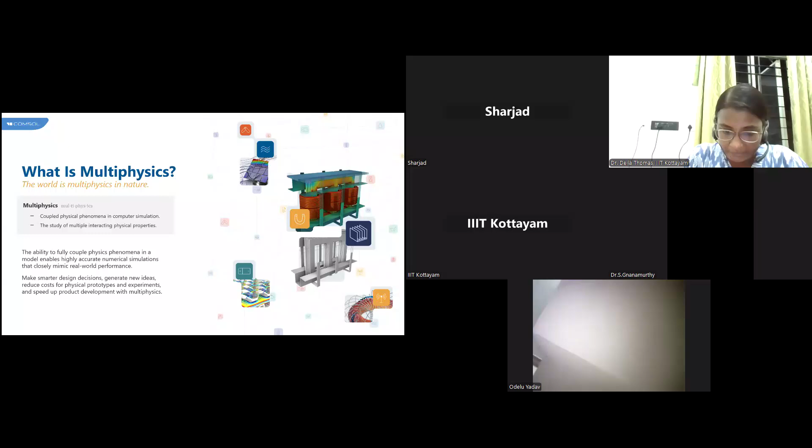Our ultimate objective for developing a product or any kind of device is to attain the maximum efficiency, or the optimum efficiency. Optimum efficiency means reducing all sorts of losses and making it sustainable. From this perspective, multiphysics simulations are really important.

If we take an example of the transformer shown in this figure, the primary or dominating physics in this example is electromagnetics - specifically, low frequency electromagnetics. If you are designing a device without considering any other physics, and only looking into the electromagnetics part, there will be a lot of losses.

That eventually leads to an unsustainable way of usage - there will be a lot of losses, such kind of issues will happen. So we need to understand what all the losses are incorporated in that particular device, like the transformer. While the transformer is running for a long period of time, the primary losses will be in terms of heat. So we need to understand the heat generation.

For that, on top of low frequency electromagnetics, the second physics that comes into the picture is heat transfer - we understand about the heat generation. Once we identify that, after the heat transfer simulations, we understand that the temperature is going beyond the permissible limit of that particular material, which also sometimes leads to some sort of losses.

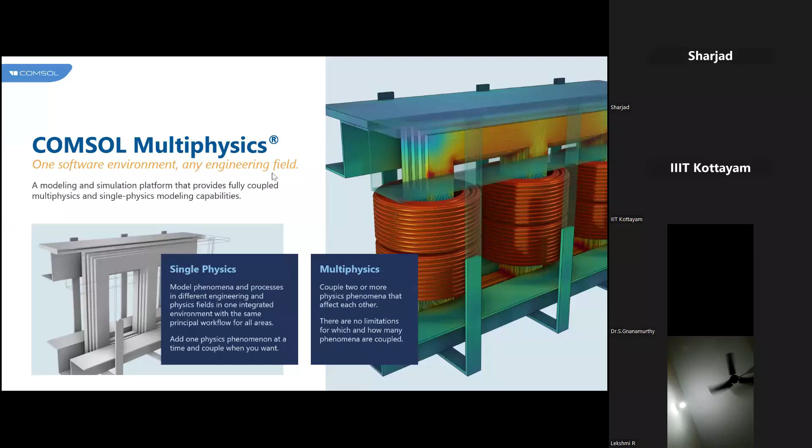So now I'll give a brief idea about what all the offerings from COMSOL Multiphysics are, or what all physics COMSOL handles.

The first physics will be CFD, the fluid dynamics, where you can solve all the problems related with fluid flow. It can be a single phase flow, like laminar flow and turbulent flow, or you want to solve a multi-phase flow where two different types of fluids like gas and liquids are in a single system, or two immiscible liquids system. All such kind of problems you can solve using these fluid flow or CFD products available in COMSOL.

Next physics will be electromagnetics. When it comes to electromagnetics, we broadly classify it into two subcategories: low frequency electromagnetics and high frequency electromagnetics. Low frequency electromagnetics is related with electric machine designs like electric motors, generators, inductors. Such applications we can handle through the low frequency electromagnetics products.

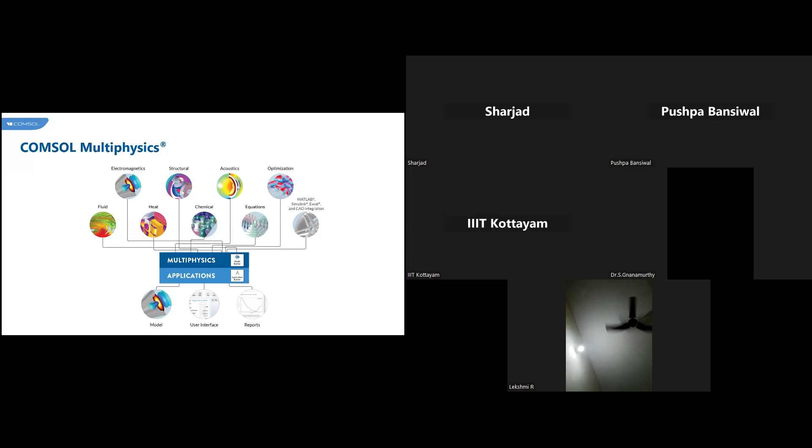Then next will be high frequency. One of the products in high frequency is the RF module. That is specifically for high frequency applications like antenna design, EMI/EMC analysis of PCBs - all such high frequency simulations you can run using such modules.

On top of that, we have modules for semiconductor related applications, like semiconductor devices such as MOSFETs, transistors - all those kind of semiconductor products or devices we can solve from the electromagnetics perspective. We are also capable of solving plasma problems directly. We have dedicated interfaces for plasma related applications, and also electric discharge simulations using the electromagnetics module.

Then next one will be heat transfer. We all know we have three modes of heat transfer: conduction, convection, and radiation. All three modes of heat transfer can be simulated using COMSOL Multiphysics, either standalone or as a combination of all three, or either two of them. All sort of simulations we can run using COMSOL Multiphysics in terms of heat transfer.

Next is the structural mechanics module, where we can simulate both linear and nonlinear problems in terms of geometry as well as material nonlinearity. There are also modules for composites, rotor dynamics - all those kind of structural related problems we can solve using the structural mechanics module.

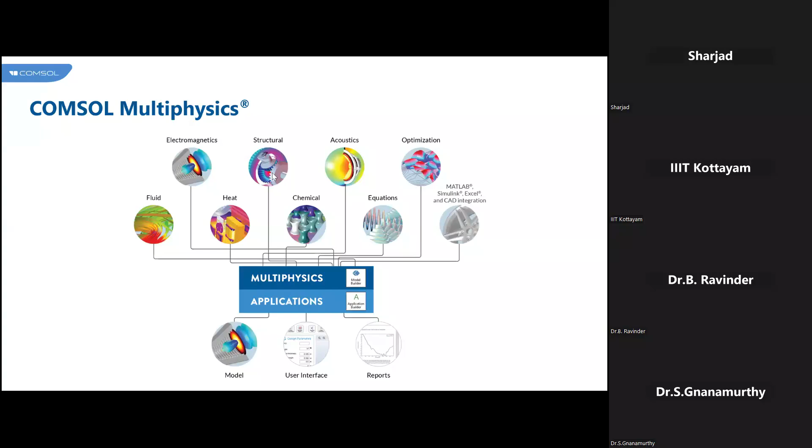When we take an example of external aerodynamics of a car, there are a lot of places where drag is too high, and that drag is actually leading to more consumption of fuel. So by using the shape optimization techniques that are available, you can optimize the shape with the objective to reduce the drag. So you can reduce the drag and increase the aerodynamic performance of the car, and that will eventually increase the fuel efficiency of that particular car. That is one way of optimization, called shape optimization.

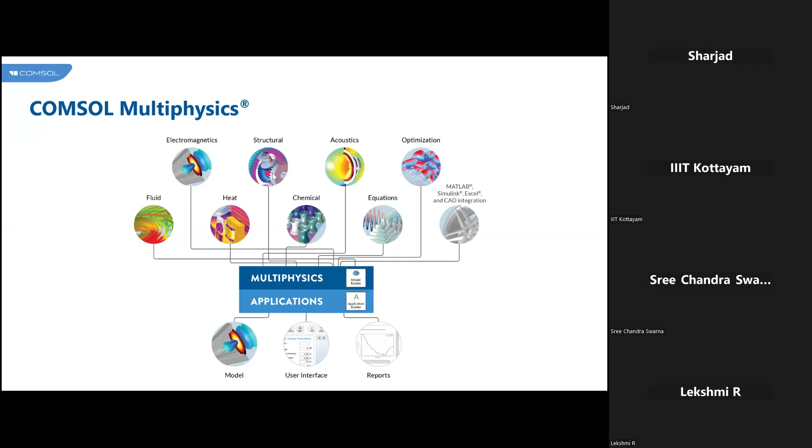Another will be primarily topology optimization. It is mostly for structures, where the objective is material reduction. There will be a few over-designed parts in any kind of device. Those kinds of over-designed parts we can optimize using the topology optimization technique. By using it, you can optimize your design or the part with less material, without affecting the capability or the physics.

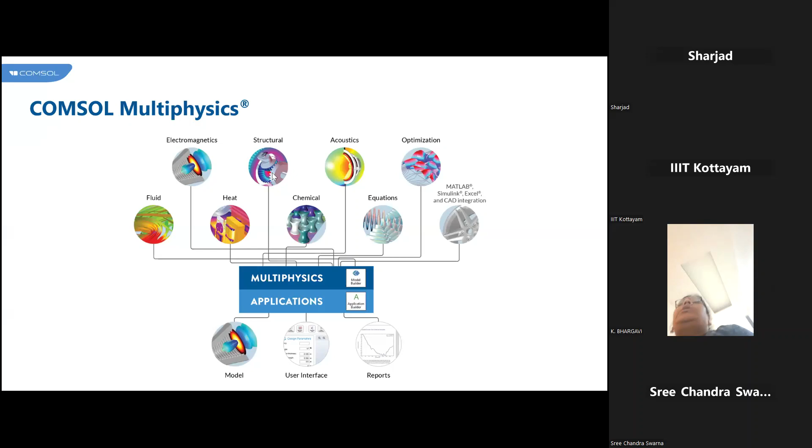By using such techniques, you can cut down the material, so of course it will cut down the cost of your product. Such optimizations you can do using the COMSOL Multiphysics optimization interface, and these optimization techniques work with all the physics tools which COMSOL offers. It can be CFD, structures, electromagnetics, heat transfer; with all those physics you can use these optimization techniques. On top of that, we are providing certain LiveLink features with some other tools that I'll give an idea of in the later slides. So that is all about the various physics which we handle using COMSOL Multiphysics.

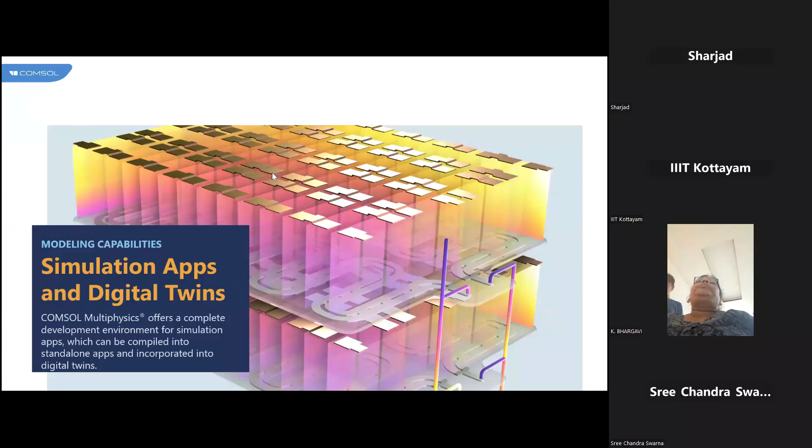On top of these physics-based products, COMSOL offers capabilities for building simulation apps, and based on the simulation app, you can build the digital twin of your model. A simulation app is similar to the applications we usually use on our phone. Instead of doing the entire simulation, to get a very fast simulation we select a few necessary inputs and a few necessary outputs. Based on that, we build an app, and this app can be run even without a COMSOL license. I'll show you how an app looks during the demo part.

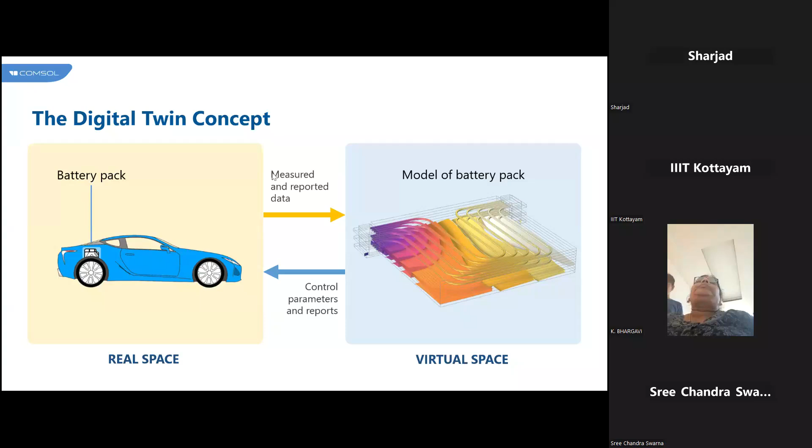As we all know, a digital twin is a connection between the virtual space and the real space, with data transfer between these two spaces. In COMSOL digital twin models, we implement this connectivity through several web services. Here you can see the virtual space has been built by a COMSOL simulation app, and we connect to the real space through this web service. It is a bi-directional connectivity, and we get real-time results. For example, this is a battery pack, and from the battery pack we are getting measured data, for example HPPC data.

It is transferring to this particular battery model, and it is getting processed, and we need to give it back to this particular real space itself. So first, one thing we need to think about is the simulation is supposed to be fast enough. Solving a complete model for such kind of digital twin based applications is really difficult because it's time consuming. We will not get a real time result fast enough if you are using standalone or default models.

For that, actually, we need to build a behavior model. Here comes the application of machine learning techniques in COMSOL Multiphysics. The technique we are using for building such a behavior model is called surrogate modeling. By using surrogate modeling, you can create a computationally less expensive model, which can be based on any kind of physics-based simulations which you have been doing using COMSOL Multiphysics.

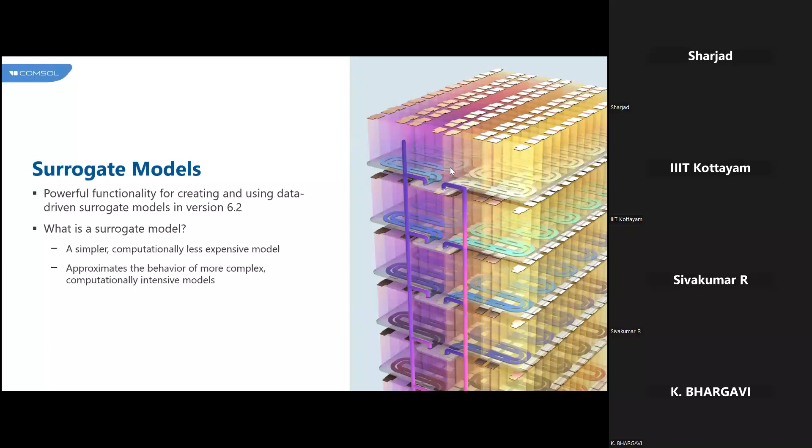Such features are available with COMSOL in terms of machine learning, where instead of running the complete model for this kind of digital twin, you can build a surrogate model or a behavior model using the surrogate modeling feature. Basically, how surrogate modeling works is, initially we will do a DOE or design of experiment based study, a different set of complete simulations. Then we will train those data using a deep neural network technique. Then we will build the behavior model, or we call it a surrogate model.

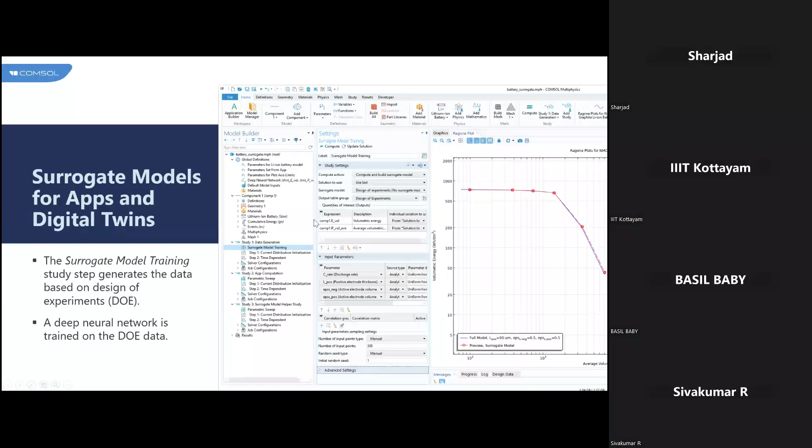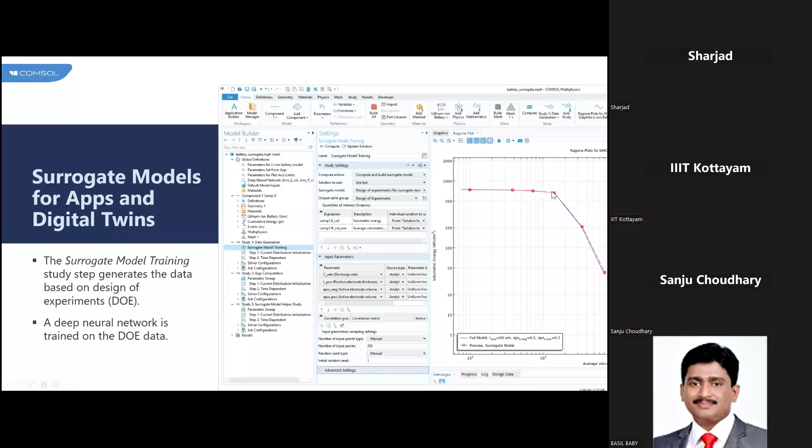This is in the interface itself. You can see this is an example, where the blue continuous lines are the complete full scale model simulation data, and these red dotted lines are the surrogate model which we have built by training the DOE design of experiments data using this deep neural network technique. You can see that we are getting a very good match between both these data. Actually, this is an example of a battery. Such behavior models you can build using COMSOL Multiphysics for developing the digital twin for real-time simulations.

As I have already told, the advantage of developing such a behavior model using surrogate techniques is instantaneous solutions, because this is just a behavior model. Take the example of this particular figure itself, here you can see only 3 parameters and 1 output. If you are changing the positive electrode thickness or negative electrode active material fraction, any of these 3 parameters, this particular result will also get changed instantaneously. That is what we call fast simulations, because if you try to do this kind of change in the legacy model or the full scale model, it will take a lot of time.

But as you have a behavior model with only 3 inputs and 1 output, and we trained a certain set of DOE data using the deep neural network technique, it will work based on that behavior model. So it will predict very fast, so that for building a digital twin, we will get the result instantaneously, and the to and fro communications between the real space and the virtual space will be fast enough. So that is one of the ML techniques available in COMSOL Multiphysics for building digital twins.

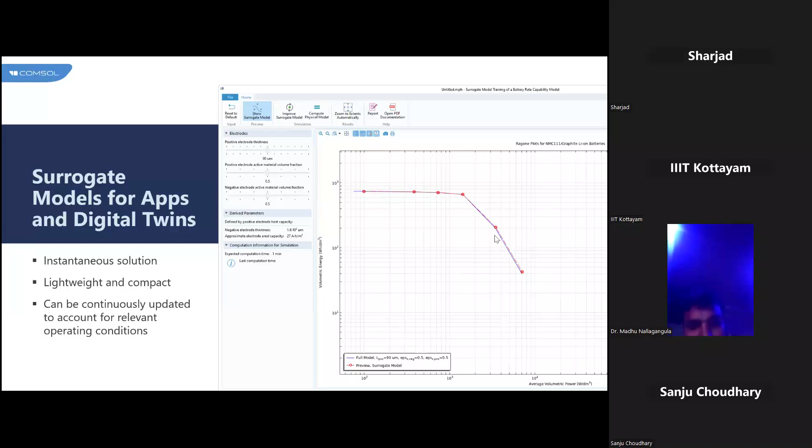For doing all such capabilities, whether physics-based simulation or twin building or twin modeling, we offer different products. The base product is the COMSOL Multiphysics base product. That is the parent code where everything runs. It consists of very basic capabilities as well, like the Model Builder, Application Builder, and Model Manager. All three are part of the base package. On top of that, there are physics-based simulation capabilities, like all sorts of linear simulations we can do using the COMSOL base package.

But if you want to do advanced simulations, for example a multi-phase simulation, that is not a part of the base package. For that, you need to use the CFD Module. Or if you want to do non-Newtonian fluid flow simulations, then you need to use the Polymer Flow Module. Similarly, when it comes to electromagnetics, if you want to do rotating machinery or electric machinery simulations, you need to use the AC/DC Module. The RF Module is for high frequency applications like antennas. Then the Wave Optics and Ray Optics Modules are both for light simulations.

As we all know, light can exhibit both wave and ray nature. So when it comes to wave optics, where the characteristic length of the device is nearly equal to the wavelength of the light, in those cases we will use wave optics. In that case it will act as a wave. Then ray optics will be primarily for optical systems where the characteristic length of the device is much higher than the wavelength of the light. In such cases we will use ray optics.

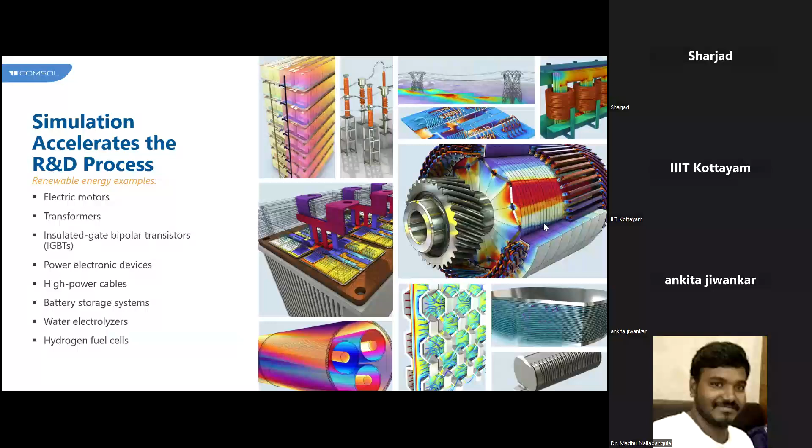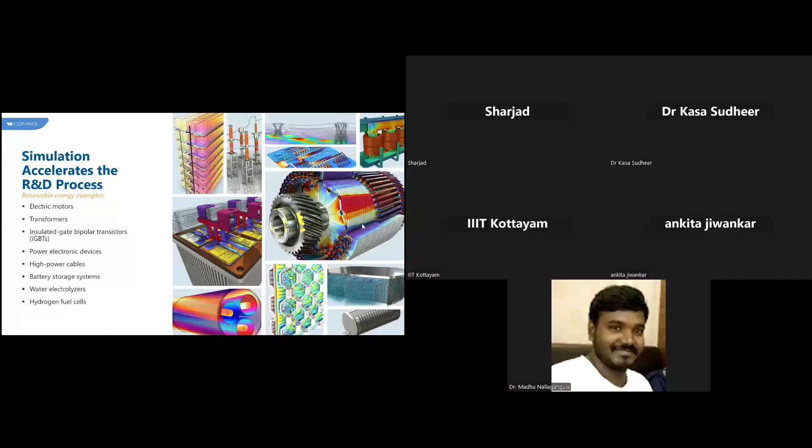Hello, someone unmuted. Hello. Okay. So I request all the participants, please mute your mic.

So when it comes to simulation-driven R&D processes in the various areas of the renewable energy sector, the first one will be electric motors. A lot of losses can happen in that device if you're not designing it properly. These days, research related to electric motors is booming because of EVs and hybrid vehicles. So we can use the capability of COMSOL for designing various types of motors, transformers, different types of IGBTs for semiconductor devices, power electronic devices, batteries, electrolyzers, hydrogen fuel cells, and solar cells.

I didn't include all those areas in the slide, but there are different areas where we can use the capability of simulation for developing very sustainable products or optimized products. Right now I'll just give very brief ideas about the various aspects, but you can connect them with your own research areas. Maybe I am only able to cover very few things within a short period of time,

but at the end, if you have any doubts, you can ask, or you can connect with how things are working, because I'll cover a few physics right now, and for the rest you can connect and get back to us.

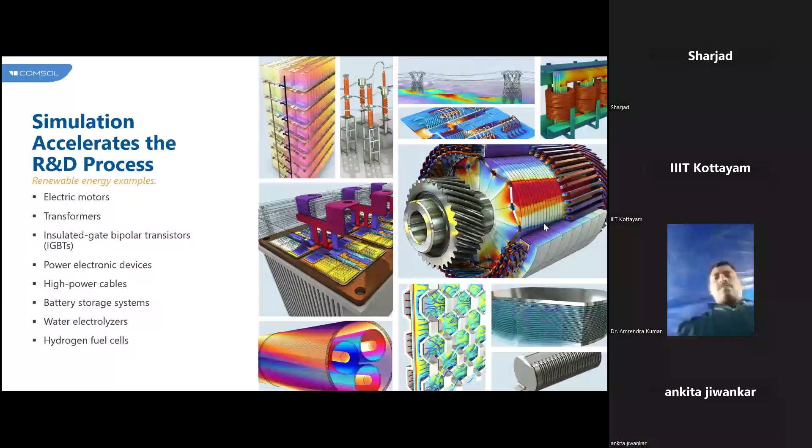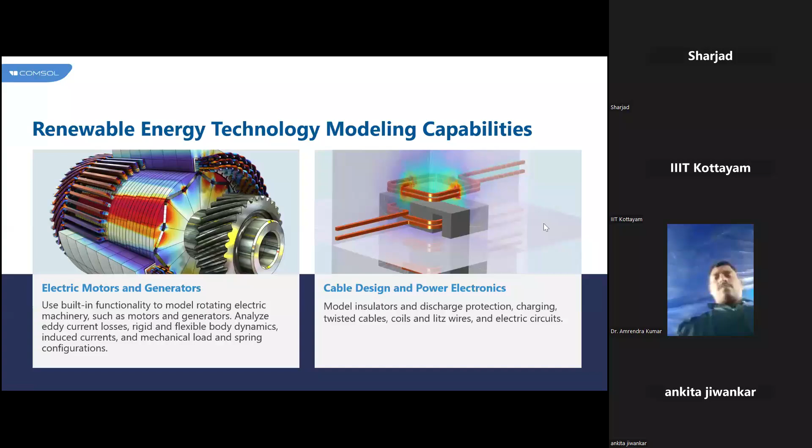The first one I will talk about is electric motors and generators, and also the modeling of cable connectivities and power electronics. For all these kinds of low frequency simulations, the module we usually use is the COMSOL AC/DC module. Using that, you can develop various electric machines like permanent magnet machines, linear motors, or axial magnetic bearings. All sorts of moving or rotating machinery you can simulate using COMSOL Multiphysics.

You can also do various electromagnetic heating simulations by coupling the AC/DC module with the Heat Transfer Module. Through this coupling, you can understand the heat generation, and you can use several techniques to reduce that heat generation. That will lead to the optimum performance of that particular device.

This is a case study where the COMSOL team worked with Volkswagen on developing an electric motor. Initially they started with the design of electric motors. Then they understood that it is a repeating R&D process, so they built an app as well, based on the results they got and the model they had built. They did multiphysics simulations to understand the electromagnetic behavior as well as the thermal behavior of the electric motor for their EVs.

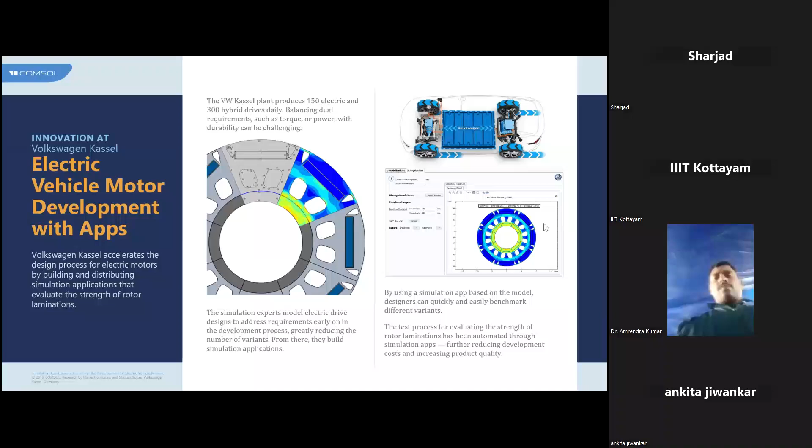Another application is related to the IGBT. Again, it is primarily a multiphysics problem where they are looking into electrothermal as well as thermomechanical simulations. This semiconductor component is placed in a situation where a lot of heat comes into the picture, and there will also be a lot of vibrations. So they need to understand how this device behaves under various thermal conditions as well as various mechanical conditions.

Initially they did an electrothermal analysis by coupling the electromagnetic solver with the Heat Transfer in Solids, that is the Heat Transfer Module. Once they got the temperature data, because of the temperature rise and the environmental temperatures, there will be some thermal stress formation and it will affect the mechanical performance. For that, they did thermomechanical simulations by coupling heat transfer physics with structural mechanics.

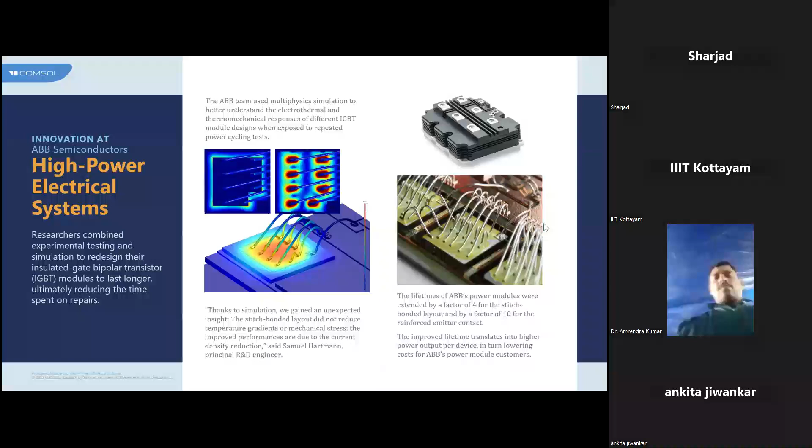So it is actually a three-physics problem where electromagnetics, heat transfer, and structural mechanics come into the picture for developing such IGBT systems or high power electrical systems. So that is about implementing electromagnetics-related simulations for renewable energy.

Another area where a lot of research is happening these days is batteries as well as hydrogen fuel cells. These two areas are growing because of the boom in EVs, not only in India but all over the globe. A lot of people are actively working on different aspects of fuel cells, electrolyzers, and batteries. And COMSOL offers dedicated interfaces for both applications.

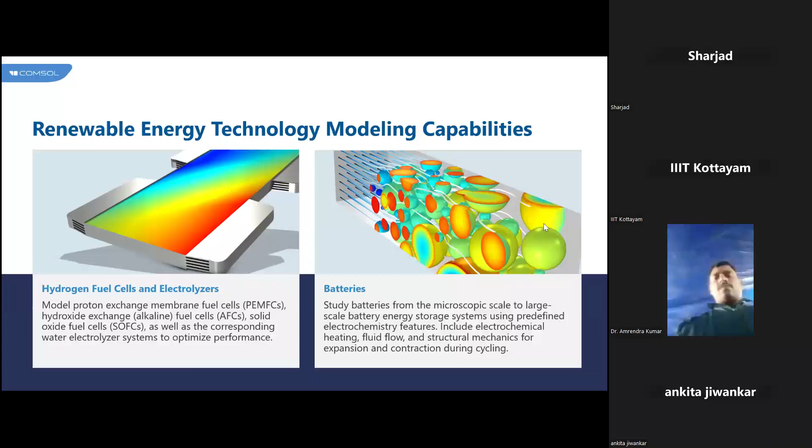When it comes to battery design, we offer the Battery Design Module, which is specifically for battery design, and it consists of various built-in interfaces for lithium-ion batteries, redox flow batteries, lead acid batteries, or you can build your own battery electrochemistry. All these electrochemistries I have explained are available built-in. But on top of that, if you want to add your own electrochemistry, that is also possible.

By using the Battery Design Module, we are able to simulate batteries at various levels. The first one is the heterogeneous model. The heterogeneous model is for when you want to understand the very micro scale level of an electrode itself, or the particle in the electrode itself. Such simulations you can do using the heterogeneous model.

It is actually very in-depth. Usually the battery manufacturers will do such kind of simulations to understand the performance of that particular electrode which they have been building. So it is more of an in-depth analysis.

Next is the homogeneous model, where instead of designing each particle in that particular electrode, we take it as a homogeneous electrode. It will be a complete 3D structure. Then we will do the battery simulations, the cell level or a pack level simulation.

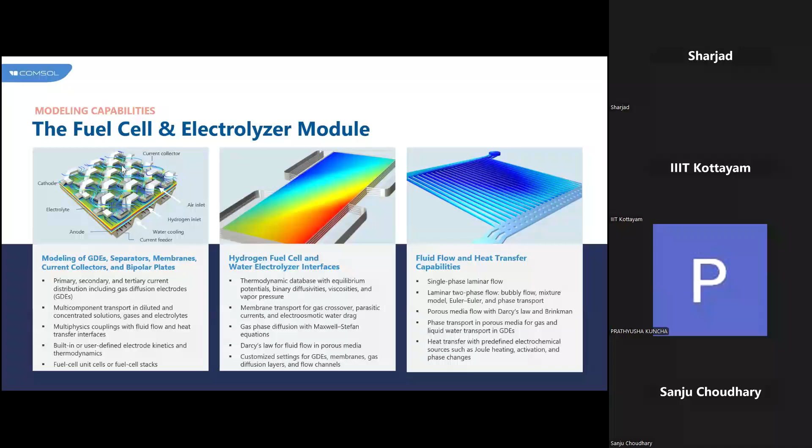Next is fuel cell and electrolyzer. For the fuel cells as well, we have different interfaces for proton exchange fuel cell or the normal water electrolyzer. All those interfaces are directly available in COMSOL for doing fuel cell related simulations. On top of that, you can add these fuel cell or electrolyzer interfaces with fluid flow and the heat transfer module for enhancing the development of that fuel cell, or understanding the multiphysics or the flow behavior. All such problems you can handle by coupling the fuel cell interface with the fluid flow or the heat transfer interface.

So this is just an example of building a PEMFC fuel cell model in COMSOL, where you can build the electrochemistry and the fluid flow, and also couple the heat transfer, so it becomes a multiphysics simulation, where we couple different physics together for the optimum design of this particular PEMFC fuel cell. Such kinds of problems you can solve.

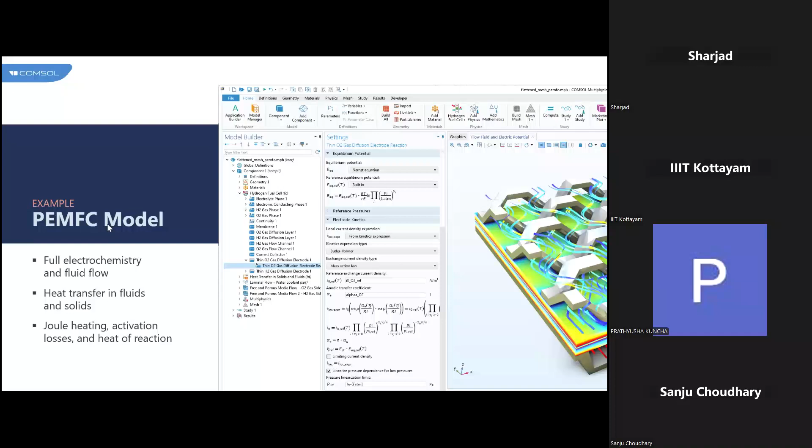So for this kind of battery cooling simulation, what you can do is design the entire battery pack as 3D, and design the pipe circuits as 1D, and club them together. That feasibility is available in COMSOL, where one physics you can develop in a lower dimension and another physics in a higher dimension, and you can couple them through the multiphysics coupling and solve. This kind of capability helps reduce the complexity of your problem.

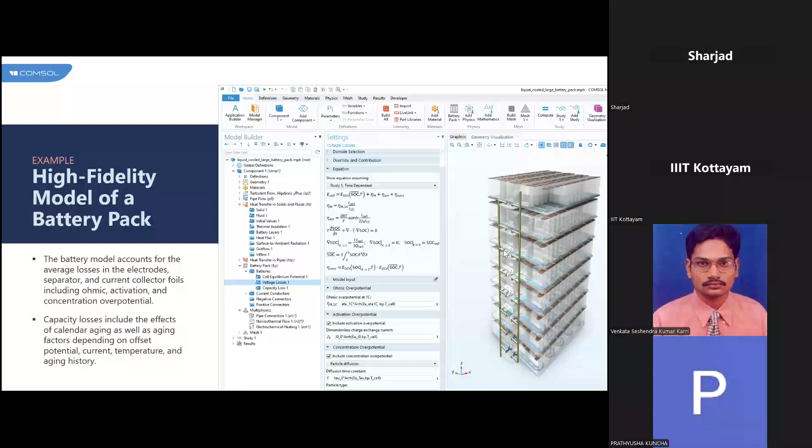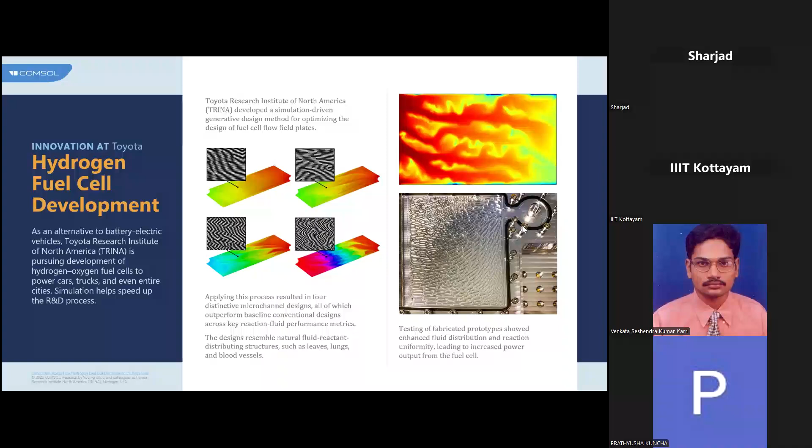Till now, I was talking about the physics like electromagnetics or fluid flow or the fuel cell or battery. When we're developing any of such kind of devices, the loss is primarily because of heat transfer. There will be some other losses as well, if two components are designed and connected together.

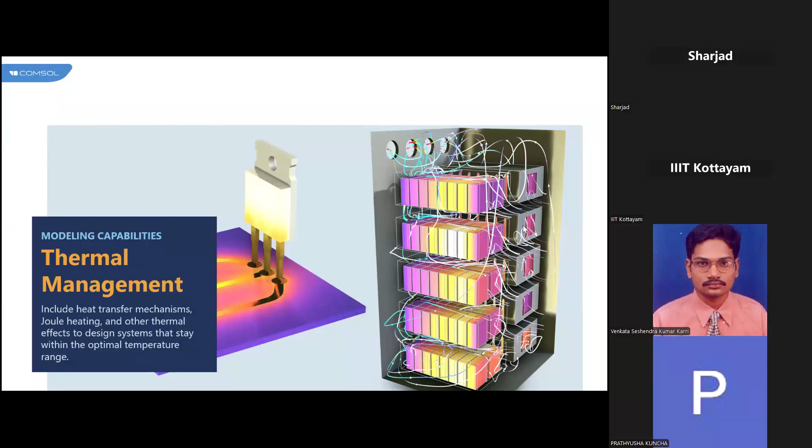If you connect it together and there is relative motion, of course there will be some friction, and because of the friction, heat generation will happen and losses will occur. Even when it comes to electromagnetics, because of resistance, there will be some heat, and that will lead to losses. So understanding the heat loss or the thermal behavior of the system is really important when we are designing any kind of device.

With this, we can reduce the losses and increase the performance of our particular device. So for that, the thermal management study is really important.

If we take the two physics I have already explained, the basic three modes of heat transfer which COMSOL can handle are conduction, convection, and radiation. All three we can solve as standalone. For example, if you want to solve conduction alone, that is possible. Convection alone, that is possible. Or radiation alone, that is possible.

Or if you want to solve the combination of two or all three, that is also possible. If you take an example of conjugate heat transfer, it is a kind of phenomenon of conduction plus convection, where there will be heat transfer in solid medium as well as liquid medium. Such kind of problems also we can solve.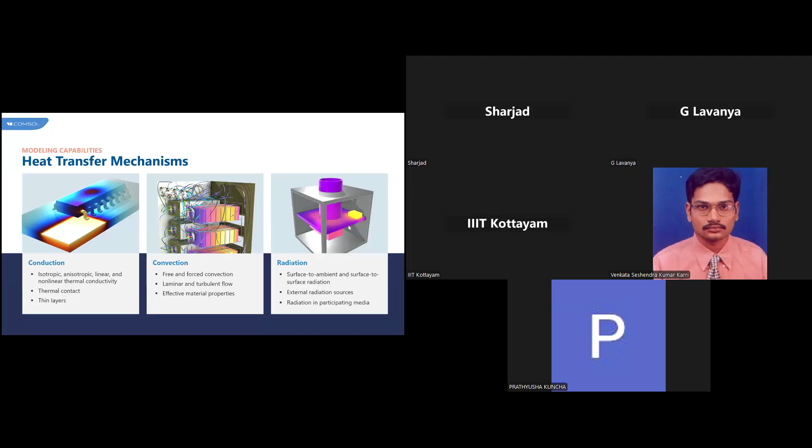Some other features when it comes to heat transfer modeling using COMSOL: by using COMSOL, you can directly accommodate various types of thermal conductivity like anisotropic, linear, non-linear, all those kinds of material properties directly in COMSOL Multiphysics, where you don't want to write any additional code. And also there are features like thermal contact, because if two parts are getting in contact with each other...

One method is you can directly design the two components as a single part and solve the problem, where conduction will be completely direct between the two parts. It is more idealistic in nature.

Actually, if it is an assembly kind of problem, we require a kind of thermal contact boundary where you can specify the source and the sink so that the heat transfer will be proper, and if there is any loss, that loss will also get captured. If it is designed as a single part, there will be no loss — that's what I meant by idealistic. When it comes to the real scenario, that loss will happen.

Without going with such an approach, if you are designing, definitely it will be an inappropriate design and the losses will be more. So you can use the thermal contact feature available in the COMSOL conduction module for providing the boundary condition for heat transfer from one part to another, where it is getting touched in a partial way, for assembly kind of problems.

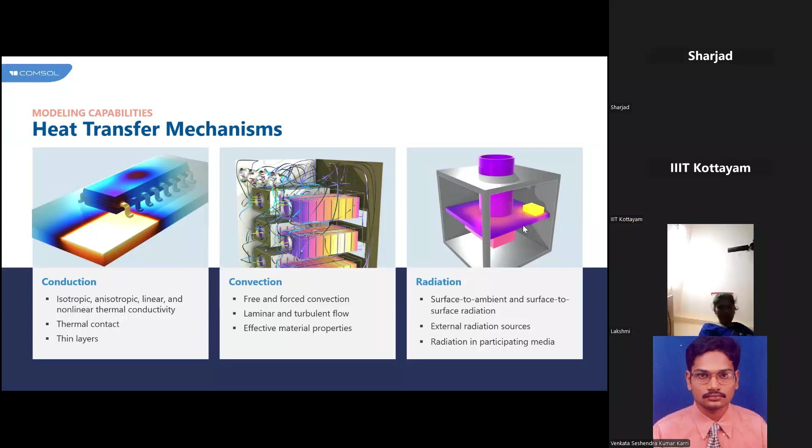Next is convection. Both free and forced convection we can solve using COMSOL, where when it comes to the flow part, you can accommodate both laminar and turbulent flow, and also different types of turbulence models can be used for this kind of convective problems, and you can couple conduction and convection for conjugate heat transfer problems.

Another is radiation, where your temperature is too high and heat dissipates in the form of radiation. This becomes really important for semiconductor applications. You can simulate surface to ambient radiation, radiation in participating media, or surface to surface radiation - all these different radiation mechanisms we can directly solve using COMSOL Multiphysics. So these are the different types of heat transfer mechanisms we can solve using COMSOL.

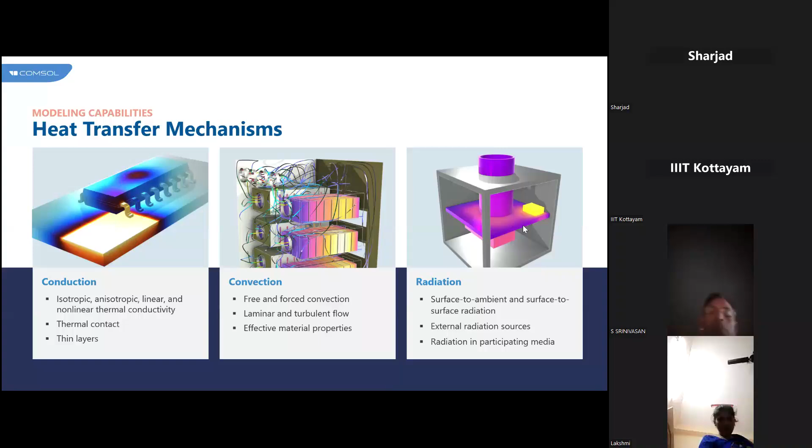So solving any kind of heat transfer problem, the key important feature is the heat source. As I've already told, when designing a particular problem, the heat source is not idealistic. If you are designing a motor, for example, and want to design it efficiently, you need to do an electromagnetic simulation. Because of the electromagnetics, there will be heat generation - that is electromagnetic heat generation. So basically that is the heat source.

So in all the CAE tools, there are different methods. The first method in almost all CAE processes is user-defined expressions. In this first approach, how we solve the problem is we input the heat value directly - for example, 1000 watts or something - or we write it as an equation itself. So that is one method, the first idealistic approach.

Another approach is solving one problem, taking the heat map value from that, then adding it to the heat transfer and solving. This is the kind of approach most tools basically use, where they'll solve the first physics, then take the temperature or heat value and give it to the heat transfer solver, then solve the heat transfer problem. It is also idealistic in nature, with no bidirectionality, not considering the aspects of interchanging data. So the best approach for understanding heat generation because of losses is multi-physics coupling, where we couple different physics together in a single interface and solve the problem.

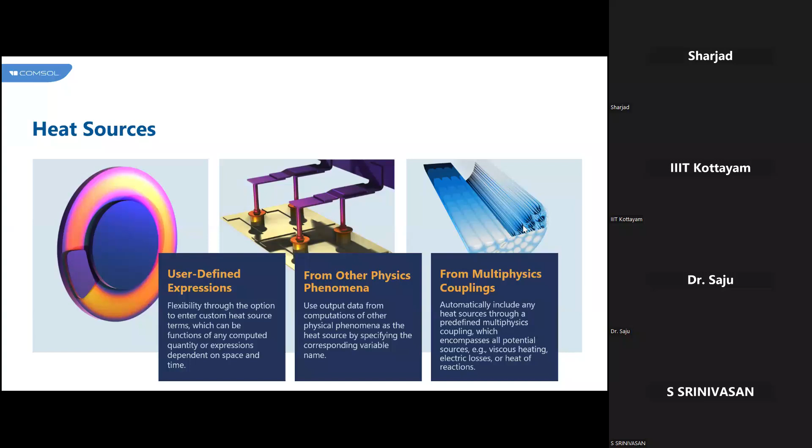The different multi-physics couplings available are: first, microwave heating - that's a coupling between the RF module, the radio frequency module, understanding heat generation because of microwaves. One particular example you can see is a chip inserted inside a human skull. Because of the continuous operation of the chip, how much heat is generated and how it's transferred to the human body - such simulations we can do, coupling RF with heat transfer.

Next is Joule heating. This is an example of a bus bar where there's electric current, and because of electric resistance, there's some heat generation - that we solve with Joule heating. Next is inductive heating. All three - microwave, Joule, and inductive heating - fall under the electromagnetic heating part.

Next is the thermoelectric generator or thermoelectric effects, like the Seebeck effect and similar problems you can directly solve using COMSOL. Next is conjugate heat transfer, where we couple CFD with heat transfer, or the fluid flow module with heat transfer - that's also a key important feature.

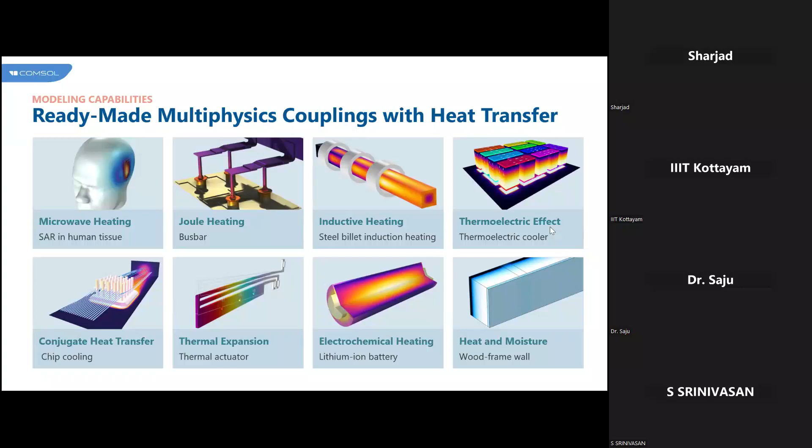So for such kind of problems, you don't want to build the multi-physics interface manually. You need to select the first two interfaces, and automatically the respective multi-physics will get developed in the model builder. I will show you that later.

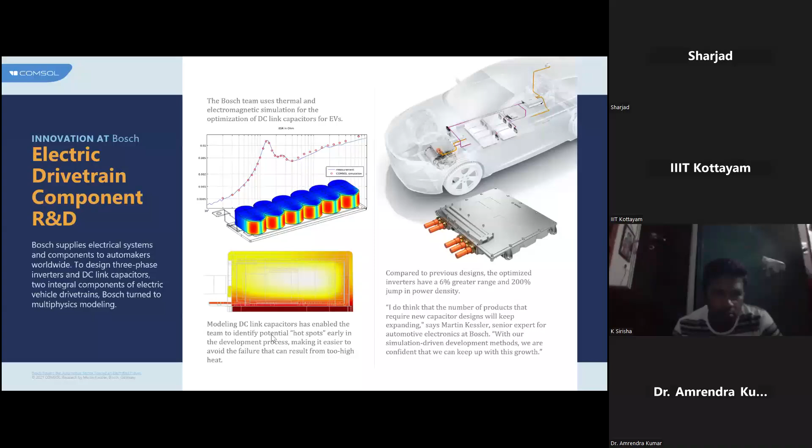So that is about the heat transfer part. This is a case study where our team worked with Bosch, where they were developing a DC link capacitor. These DC link capacitors are closely packed, so they were already aware there would be significant heat generation. They needed to predict how much heat is generated and what type of cooling mechanisms to use. So even before starting experiments or building the product, at an earlier stage itself, they did the simulation using COMSOL multi-physics. They understood the hotspots in that device and used proper cooling mechanisms to reduce the heat, and came up with the optimum performance of that DC link capacitor circuit.

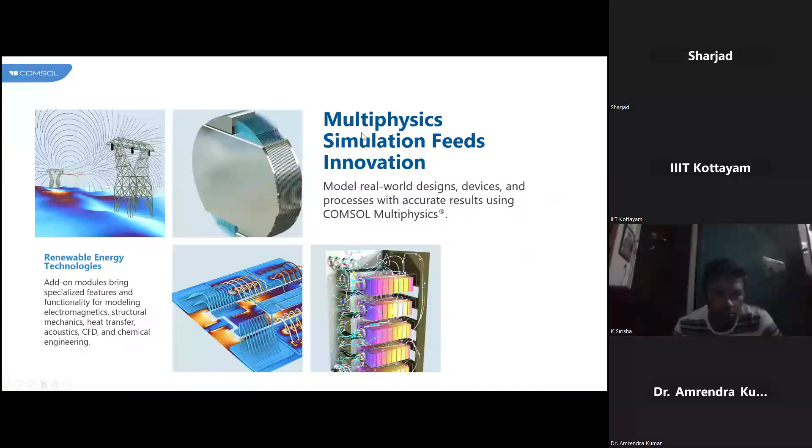And the next, sorry. Okay, so that is about the one case study from the heat transfer perspective. Now I'll just quickly open the tool and explain.

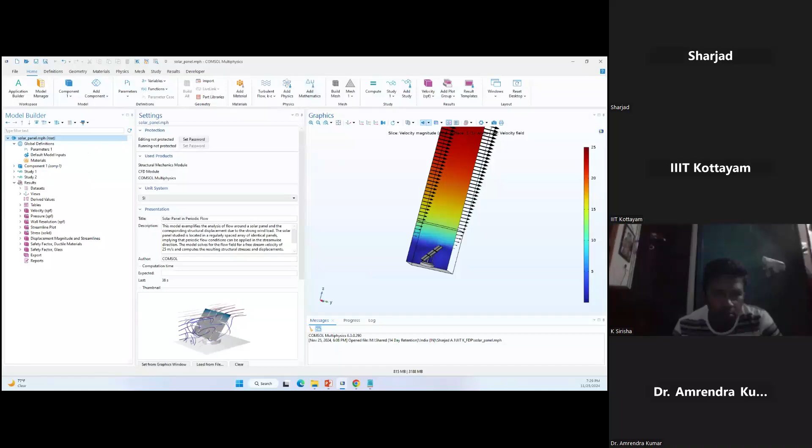Sir, is this an open source tool or? Hello? Is it an open source tool, sir? No, it's a licensed tool.

Okay sir, thank you. So this is how the COMSOL multiphysics interface looks like. This is the ribbon tab where all the functionalities for building a model will be available. And this will be the model builder window, where we will give all the inputs one by one for the requirements of building a model. So that is the model builder.

The next is the settings window. If you select a node from the model builder, the corresponding inputs we will give in the settings window. This is the graphics window, where the user will get the visual, can see the changes or see the model - the visual things we can actually do over here in the graphics window.

This is the information window. We will get information regarding the model you have been building. If you're getting an error, warning, progress, or log files during the simulations, we will get it from here. So that is the overview of how the COMSOL interface looks like.

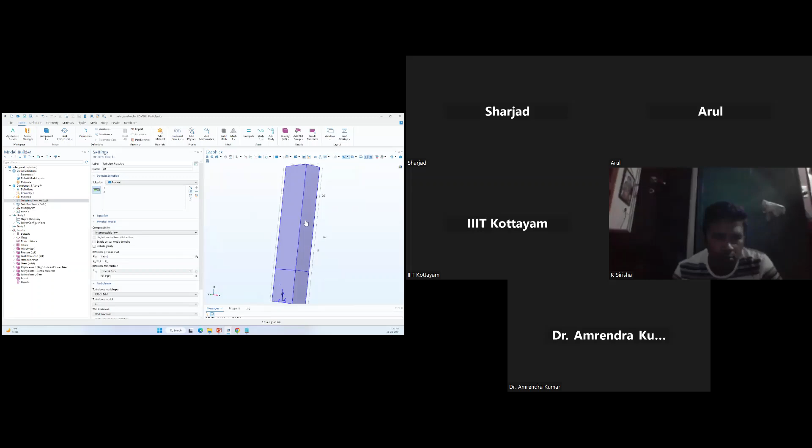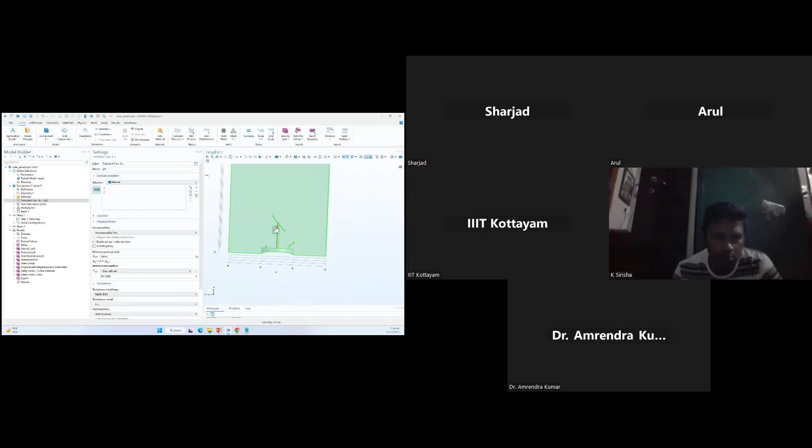Now, this is actually a problem of a solar cell or solar plates, which is placed in a specific location where wind is flowing with a specific velocity. It is actually meant to understand the structural or fluid-structural interactions. So the two physics that come into the picture are solid mechanics and turbulent flow.

Before that, I'll talk about the hierarchy or process of building a model in COMSOL. As we all know, all the CAE process usually starts with geometry creation. For building the geometry, COMSOL has a lot of tools directly available, like extrusion, revolve, and all those kinds of operations. By using those operations you can build your design in the COMSOL interface itself, or else you can import the design from a third-party tool as well.

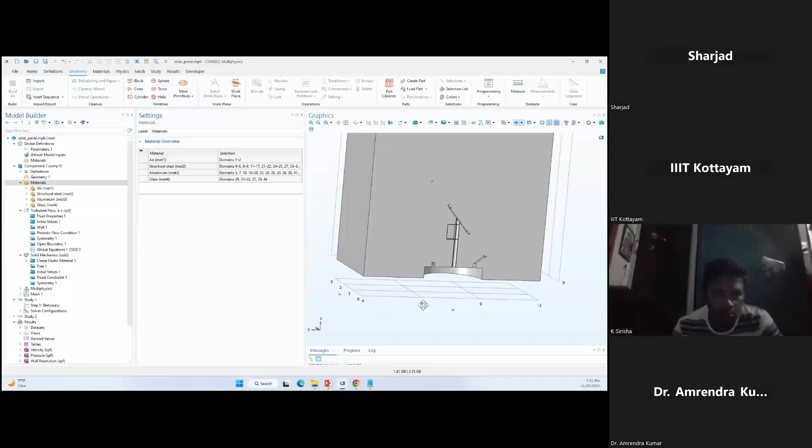Once that's done, you need to select the material. In this case, we actually build the model in COMSOL itself, but for demo purposes I have imported it from external files. Okay, so next we need to add the materials.

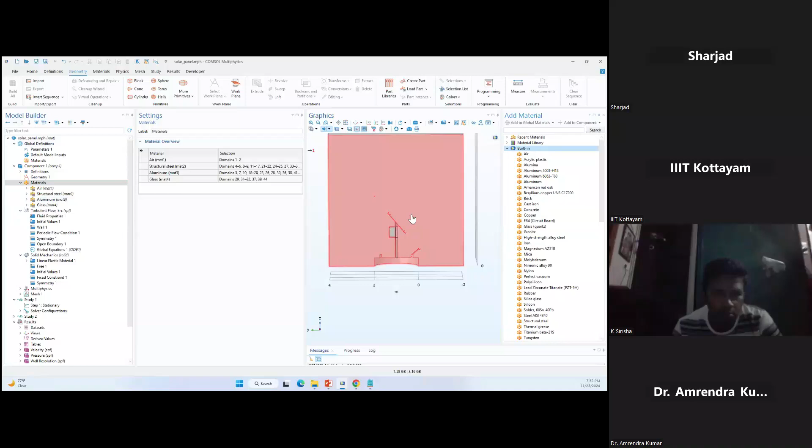When it comes to the material library, COMSOL has a very vast material library consisting of more than 15,000 materials available, listed based on applications - AC/DC if you're solving battery related problems, or semiconductor related materials if you're solving semiconductor problems. All those materials are available, or generic materials like air and water, in the built-in drop-down list. From that, you can select the necessary materials required for your simulation directly over here. You just double click on that particular material - for example, I select the high strength alloy steel.

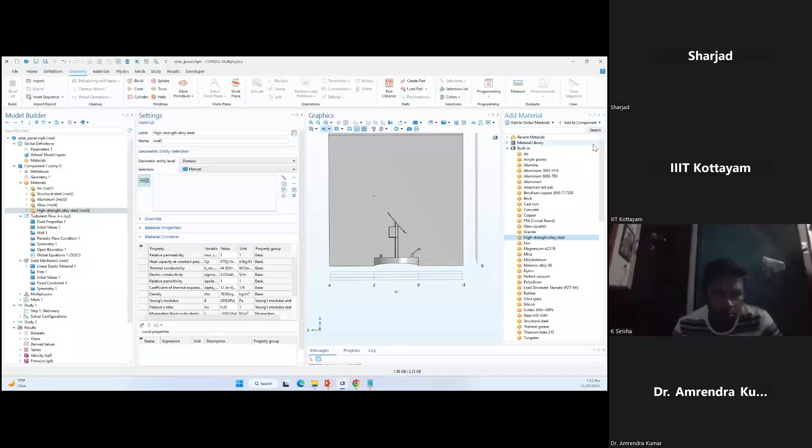If I double click, it will actually add it into our particular model builder. Then you can select the domain where you need to assign that particular material. So for an example, if you take air, this entire domain is considering it as air. Okay, that is the atmosphere.

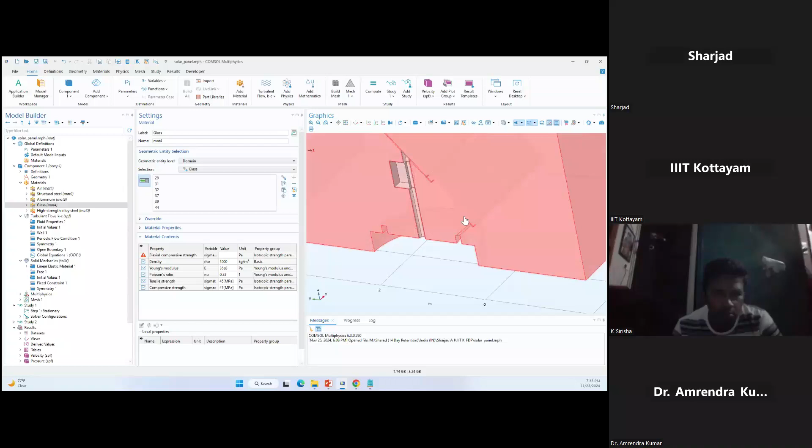Then there are domains where structural steel is provided. There are regions where aluminum domain, or there are places where glass, that is actually the solar cell. Glass is actually the property we give to the solar cell. The accurate properties also you can give. So in such a way you can add the necessary materials required for the simulations, and you can add them to the corresponding domains.

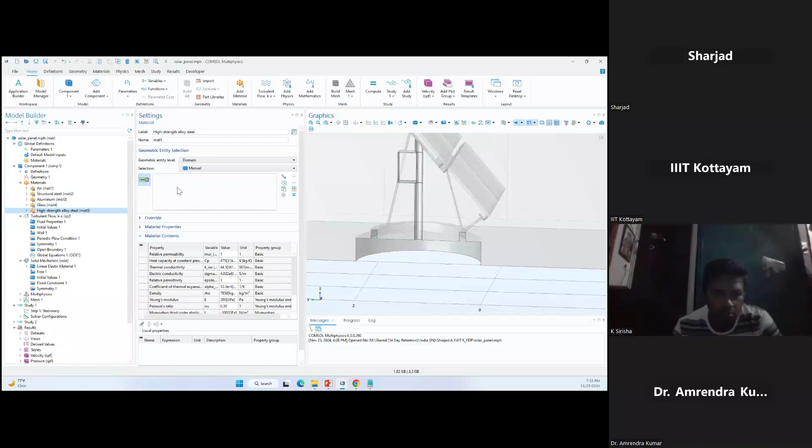So if there is any part having a high strength steel, you can select it accordingly, and that material property will be assigned to that particular part. So that is the process of adding materials for the simulation. After that, we can provide the information regarding the physics, where the various types of boundary conditions you can give.

So primarily, while solving any kind of a problem, there will be a few default nodes, like fluid properties. So two ways are there. Either those required fluid properties will be taken from the materials which we have provided over here. For an example, in this particular part, the two domains 1 and 2 are assigned to air. So for this particular fluid properties, they will take the properties from this particular air material. So that is how this particular feature works.

But on top of that, if you want to add your own material, you can use the user defined function, and you can actually give the material property over here. So those options are also available. Then next is initial value. For solving any problem, we require the initial parameters that you can give. Next is wall, for all of the wall regions. Next is the periodic boundary condition.

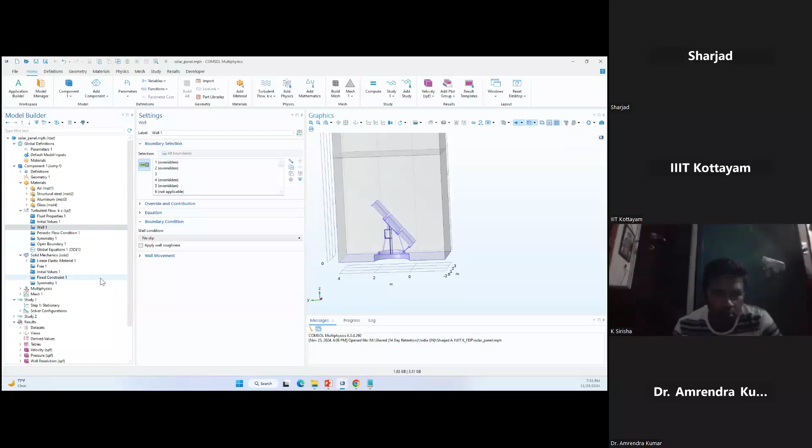So why we give the periodic condition is that this is actually repeating. We are doing a kind of a symmetric problem, and it will be periodically placed with n number of rows and columns in the array. For such kinds of problems, you can use periodic boundary conditions, where the flow comes and leaves. Then if this particular solar cell is placed over here, the inlet condition for that particular solar cell is the outlet condition of this particular face.

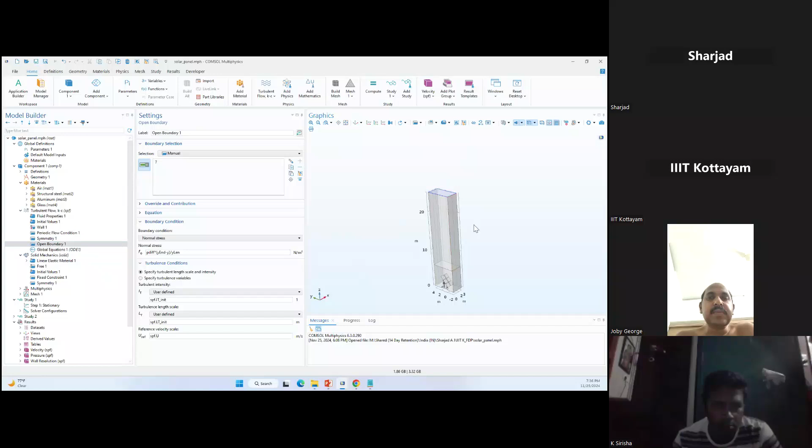So such a continuity is given by using this kind of periodic flow boundary conditions. The next is symmetry, because it will be placed symmetrically, there will be repetitions. Next is open boundary. Open boundary is a feature where it is completely exposed to the atmosphere, a huge amount of air domain. So that we collectively call this open boundary.

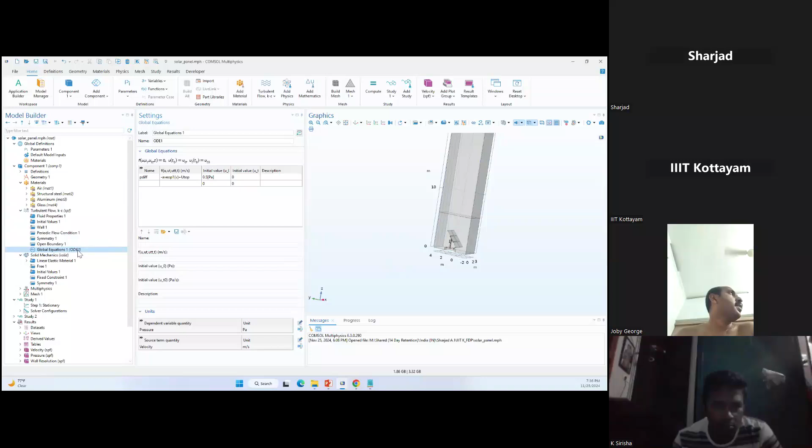Then one simple equation I have added for considering the pressure difference between the inlet and the outlet of this particular periodic flow. So that I'm giving as an equation. Why I did it is to show how we can add our own equations using equation based modeling. While talking about the various capabilities of COMSOL, I hope you remember that I already explained that we can add our own equations into the simulation. So this is how we can add them.

So I have created a term called pressure difference. That is the pressure difference between these two surfaces in the open boundary as a function of velocity at the top surface, as well as the average velocity which is calculated by the solver itself. So in such a way we can create our own parameters and add them as a boundary condition or a domain condition for the simulation.

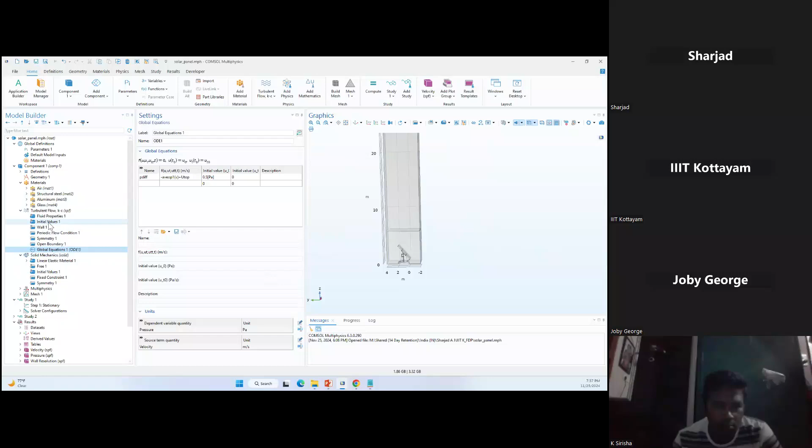So for that, we don't require any code. It is actually possible through the GUI process. Just to demonstrate that, I have added this particular pressure difference. So that is about providing the boundary conditions for the turbulent flow.

So here, users who have already used CFD tools will have a question that there is no inlet and outlet. Actually, these periodic flow conditions take care of the inlet and outlet, so you don't need any additional inlets and outlets for this kind of CFD problem where the flow is periodically repeating in nature.

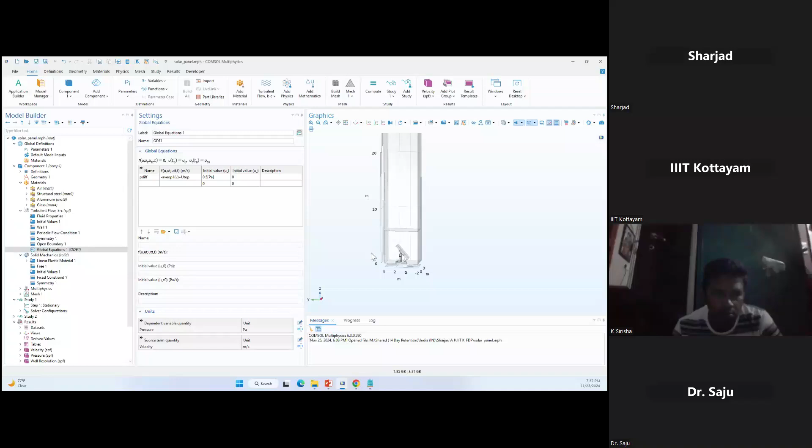So next is the structural mechanics. Here you can see for the structural mechanics, we have assigned all the domains other than that particular air region. When it comes to this particular elastic material, here as well material properties are there. They are taken from the material properties which we have assigned over here.

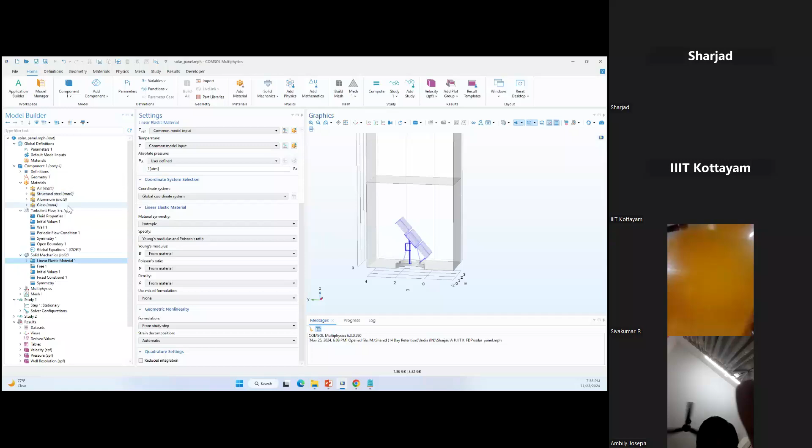Then we need to give the boundary conditions like fixed boundary. On top of that, the various boundary conditions available are something like boundary load, that is if you have a load on a specific boundary, you can give that. Then fixed constraint is for the fixed support. And if you have a prescribed displacement, a boundary that is actually moving in a specific direction by a specific length or distance, you can provide it over here.

And also the roller boundary condition, if there are situations where there is movement in the plane, you can do that, and also the thin layer. So such various boundary conditions are available for structural mechanics. Similarly, different boundary conditions are available for fluid flow as well, and for all the physics it will be available.

Which boundary conditions and how you need to set up the problem, either you can go through the theory manual related to that particular physics, and as well there are a lot of examples available in COMSOL itself that I will show you at the end of the demo. Okay, so once we provided the necessary information for these two physics, next we need to...

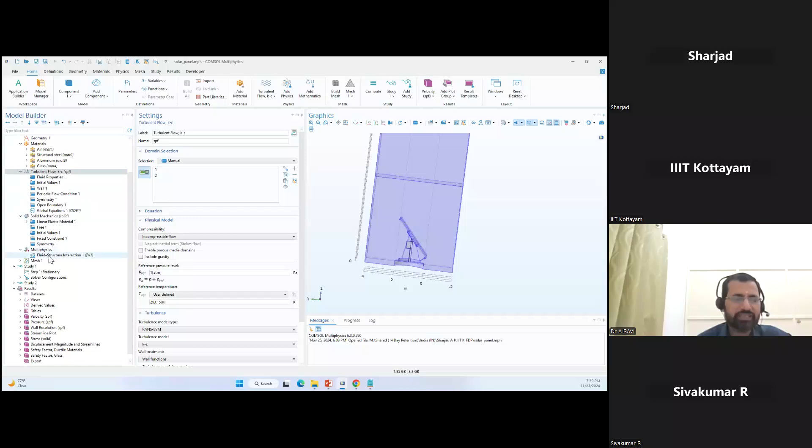Excuse me, sir. Yes. Sorry, sir, I am Dr. Ravi. If you don't mind, another resource person is also waiting, sir. Please try to... Yeah, till 8 o'clock. I think 6:30 to 8, right? Yes, sir, till 8. Sure, sure, I'll wind up by 8 o'clock. No problem. Fine, sir. Thank you. Okay.

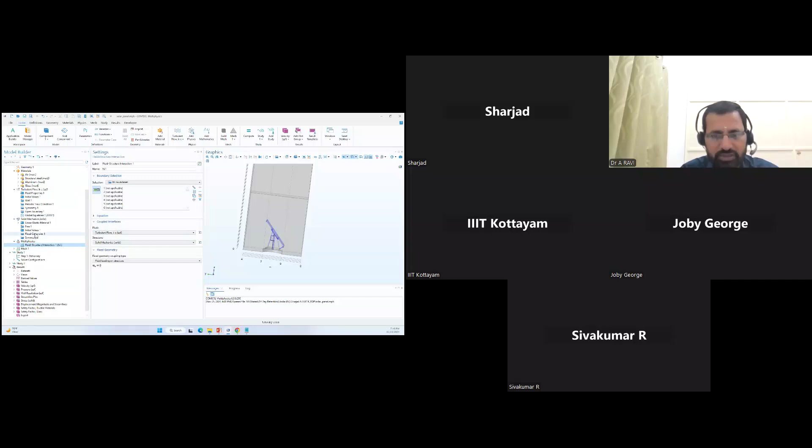So after we provided the information for these standalone physics, as I have already told, we have dedicated built-in multiphysics interfaces that give the connectivity between these two physics. Fluid structure interaction connects the turbulent flow and the solid mechanics. COMSOL is intelligent enough to take the necessary data from here for solving this kind of multiphysics problem, where the user doesn't need to think much about the multiphysics part. It will be automatically taken care of by the solver itself.

That is what I explained during the initial phase itself, that COMSOL has various multiphysics interfaces available by default as a built-in feature. So it will be handy for users to do a multiphysics simulation. Then we can mesh the geometry.

When it comes to meshing, COMSOL offers two types of meshing. The first one is the user-controlled mesh, or there is an automated process where you can create the mesh using the physics-controlled option. That is an automated process where the software itself creates the mesh based on the physics you are solving. It will be okay for an intermediate-level problem. When it comes to complex problems like this, we need to go with the user-controlled mesh option.

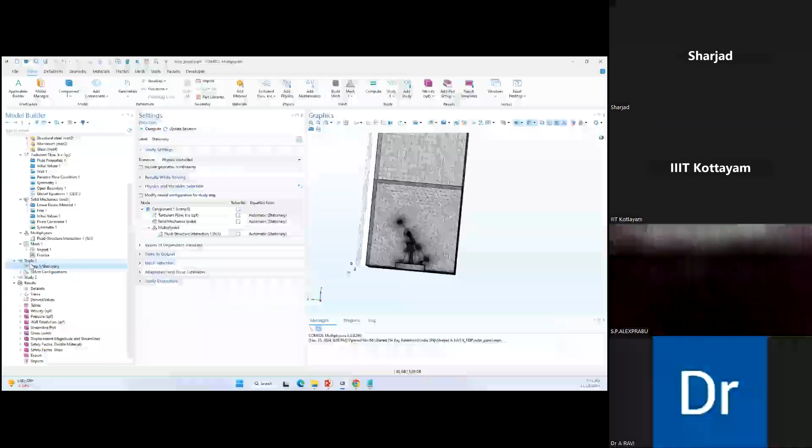Then you can solve the problem. Different types of studies are available. It can be transient or stationary for CFD problems. When it comes to structural mechanics problems, it can be eigenvalue, frequency-based, or random vibration. Different types of studies are available in COMSOL based on different physics, which we need to explore through the user manuals. Once you run the simulations, you will get the predefined plots from COMSOL.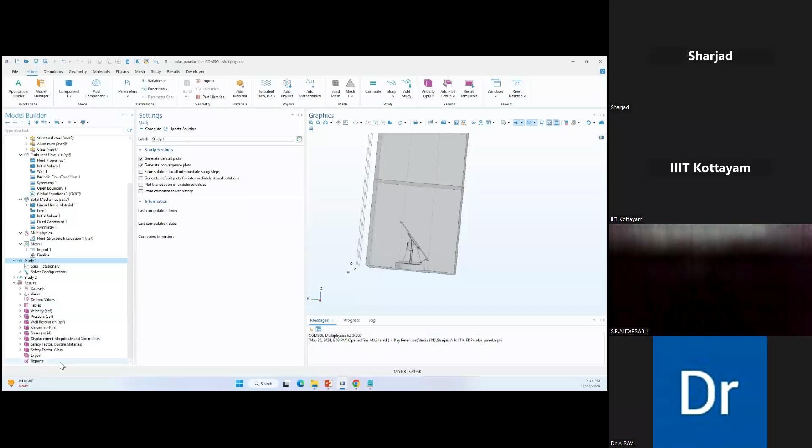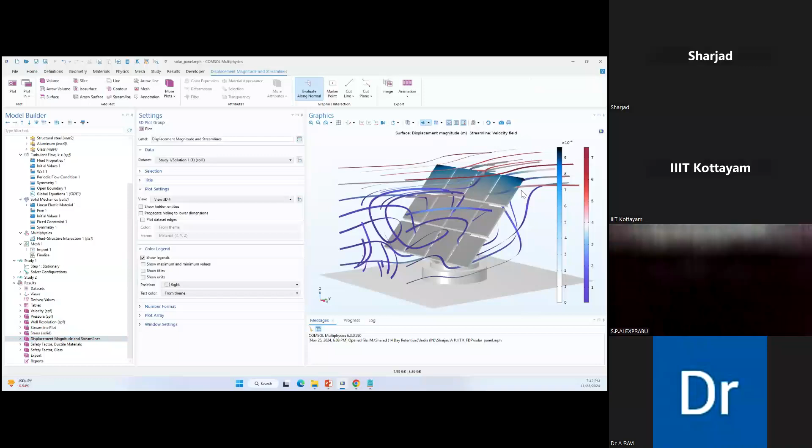For example, this is the plot of displacement plus streamline. Because it is a multiphysics problem, in a single plot we can understand the behavior of two physics: the first is displacement and the other is streamline. You can see the velocity is higher at the top region, so the maximum displacement or deformation is happening in the top region. That way you can conclude, and you will get different predefined plots from COMSOL directly. Once you run the simulation, you will get these kinds of plots by default.

On top of that, if you want to add your own plots, it's also possible. You can come to results and you can create 3D, 2D, as well as 1D plots, that is, graphs. Okay, and that is how you can add your own plot.

Also, if you want to add your own parameters, for example, here it is pressure. So instead of getting it as a dimensional value, suppose you want to write your own expression, for example, I want to know a parameter like p minus 100. So that is the expression which I want to get as a result. You can give it, and here you can see initially it was 60, so p minus 100 is minus 40. That way you can write your own expression to get the result.

So it will be really handy that you don't need to use any third-party simulation or post-processing tools to get the result. All those features are directly available in COMSOL. This is really useful, because whenever we publish papers in reputed journals, they usually accept non-dimensional data or non-dimensional graphs or plots. In such cases, some other tools don't have this expression feature, and you have to align with third-party post-processing tools. But in COMSOL, you can directly write the required expression and get those results.

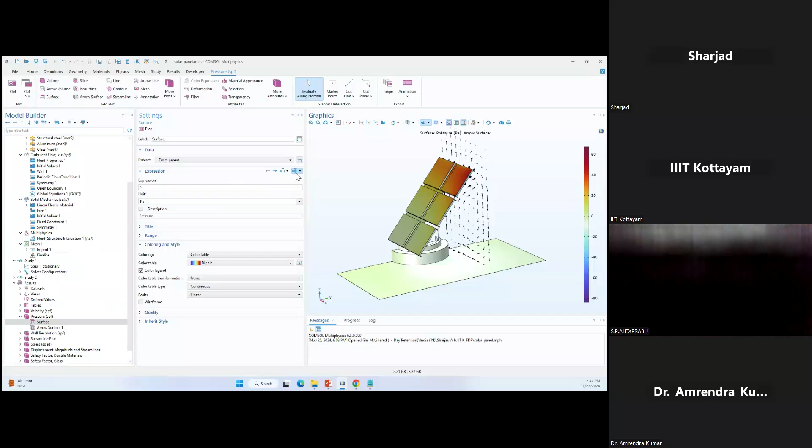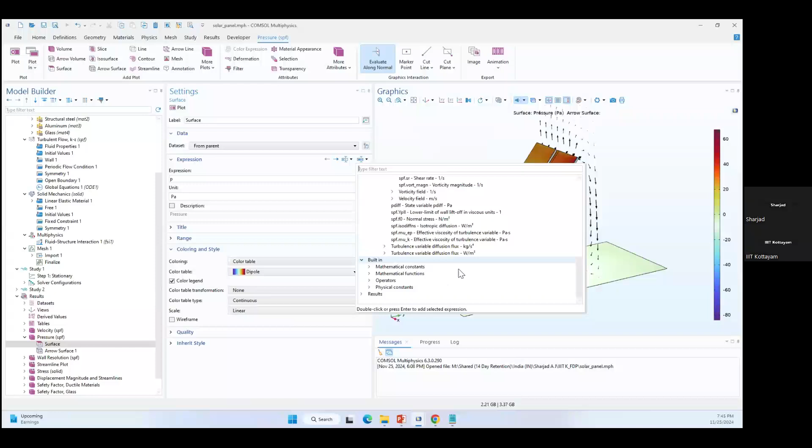How you can check which parameters are solved in this particular case is, you can come to this expression tab, enable this expression view, come to the particular physics, and here you can see which parameters are getting solved. For example, velocity and pressure related parameters are getting solved. When it comes to turbulence, what parameters are solved. All that information you will get, and based on this you can create derived expressions. Or if you need to solve that particular expression as a parameter, you can get those results as user-defined expressions.

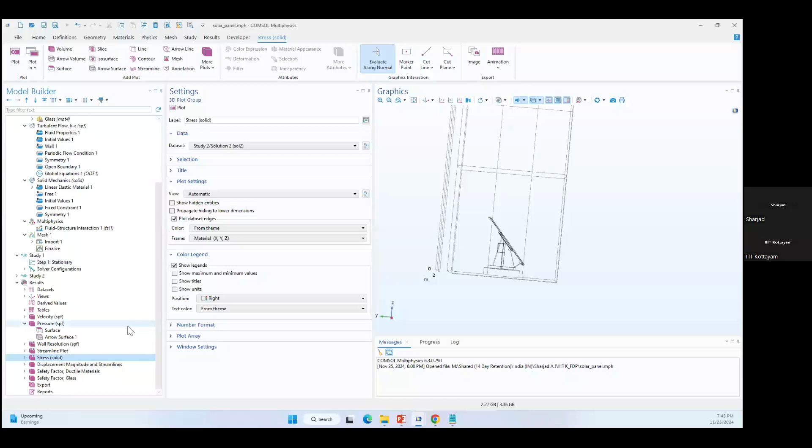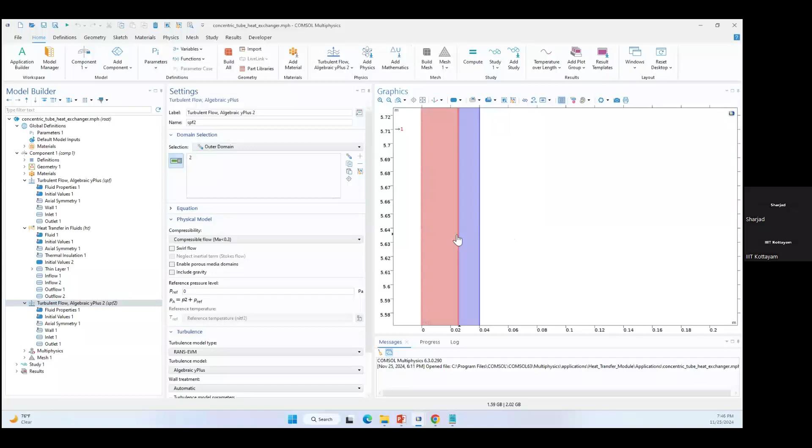So this is the model building process in COMSOL Multiphysics, with the example of a solar panel. Now quickly I'll give an idea about the COMSOL app as well. This is an example of a concentric tube heat exchanger, consisting of fluid flow and heat transfer. Here you can see there are two fluid flow interfaces: one for the inner pipe and another for the outer pipe, and there is an interface between these two phases. So this is the problem statement.

I'm not covering the complete model building process because I have already explained that, but I'll show you the multiphysics feature. Here we are coupling two fluid flows with one heat transfer, so two non-isothermal flow multiphysics interfaces are required, which are automatically created by COMSOL. Non-isothermal flow couples CFD and heat transfer. The first non-isothermal flow considers this SPF and the heat transfer, and the second considers SPF2, this fluid flow, and the common heat transfer interface. That's how this problem is solved.

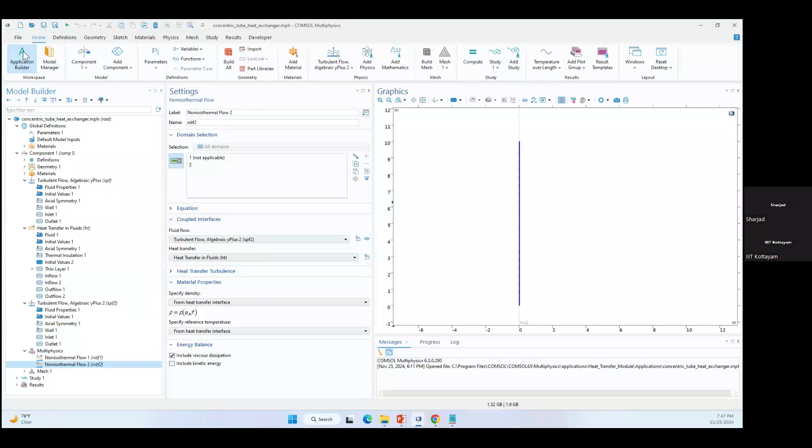And I'll show you how the apps look. This is an app which we have built based on this model. Here you can see when I click on test application, we don't need to give a lot of information as in the conventional model building process; only a few inputs are needed. Just a minute, it is loading. Here you can see there are tube parameters, that is length, inner diameter, outer diameter; all those inputs you can give. On top of that, you can change the flow parameters of the inner tube and the outer tube.

So we are only changing a few parameters and we are getting a few other results. So here we are not doing any kind of meshing. Here we are not doing any kind of multiphysics coupling. All those things will be taken care of automatically during the model building process. So as a user, if you are using this particular app, you only need to change these parameters and you can click on compute. It will compute the problem and you will get the result.

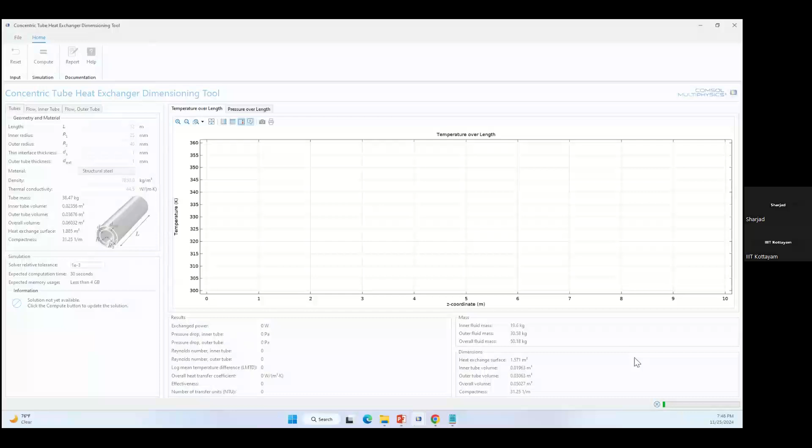So it's computational, it takes some time to run the simulations, but you don't want to solve the entire model. You only want to solve the few inputs and you will get the few outputs. So this is how the apps look. Actually, you can build the app for different physics. That will again depend upon your requirement.

And on top of that, the good part of the app is, once you build the app, for that, as I've already told, we need to do a simulation in the model builder. Then we will come to the application builder and we build this particular app. Once you have created this app, you can directly run this app on a system where COMSOL is not installed. That's what it is saying. If you want to run an app, a COMSOL license is not required. For building an app, yes, it is required.

Once it is built, you can share these apps with any person, where if they want to change a few parameters and understand how it is behaving with one or two results, they can even run it without a COMSOL license. So it will be really useful if you're transferring certain data to another customer. Instead of preparing a presentation and sending it to them, you can build the app, send it to them, and ask them to change the data and see the result in COMSOL software itself without a license. So it is really handy on that point.

Another point is, if a development team consists of 10 or 20 people, but only 1 or 2 CAE engineers are there and the rest are all CAD engineers, they want to build or try different designs, but instantaneously they want to know the result. In such cases, the CAE engineers can build the app and transfer it to the CAD engineers, who might not be aware of the meshing.

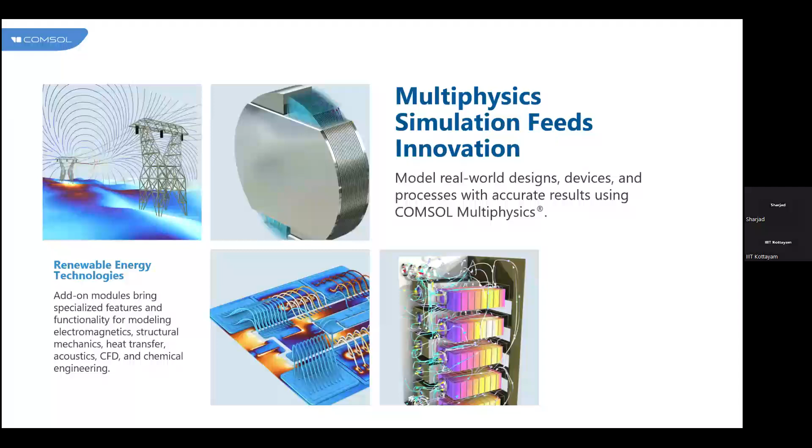So by using COMSOL Multiphysics, you can do realistic multiphysics simulations of various devices or products using COMSOL Multiphysics interfaces for different applications with a very high level of accuracy. As I've already demonstrated, you can connect n number of physics together to build a multiphysics scenario. Then you can do the multiphysics simulations and you can design your product in a well-optimized way. So with this, I'm winding up my presentation and the demo part.

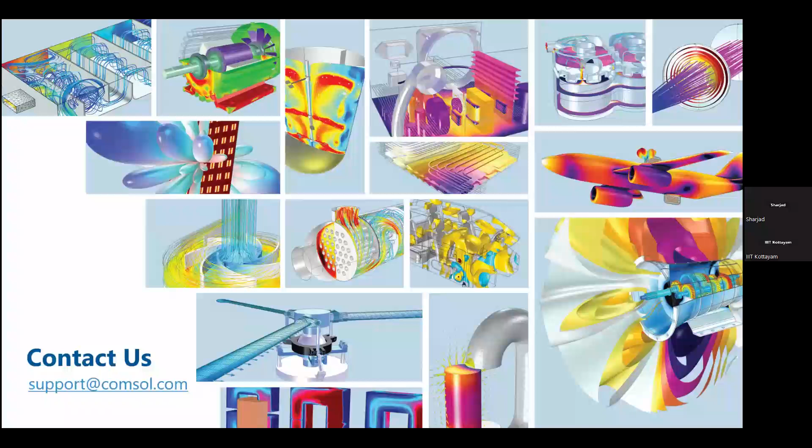Sir, I think some students have a query whether COMSOL is a paid or a free, open access software. And in the chat window also a few questions are there. Okay, I'll open the chat, one minute. Yeah.

Yeah, the first question, whether it is open source or not: of course, it's not open source software. It is paid, licensed software. You need to purchase the license, and by using that license, you can run the simulation. Again, the license also depends upon which physics you are solving. The base license is required for all. On top of that, you can buy the add-on product licenses and you can solve the problem.

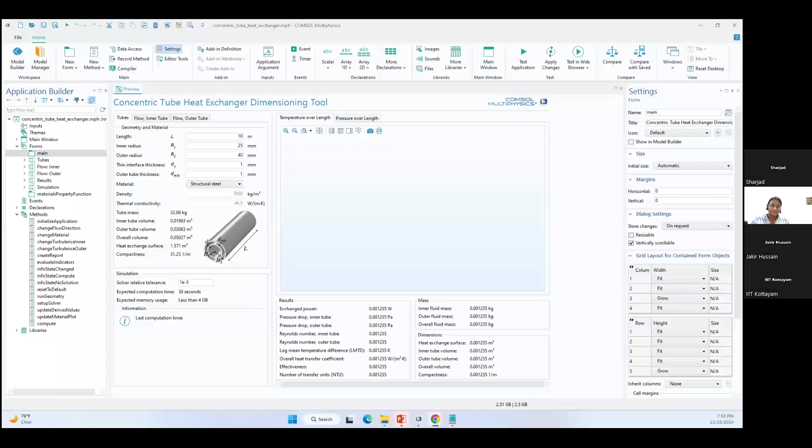Sir, all the multiphysics models, in the beginning you mentioned that 3 physics need to be identified before coupling, and do the coupling process in these 3 physics itself. Is there any constraint on that particular number 3? No. 3, I just told, take it as an example only. You can add n number of multiphysics, based on your own product.

So for an example, I'll take that particular example itself. You want to perform the heat transfer and the acoustic behavior of the motor as a multiphysics problem. So you can couple electromagnetics, heat transfer, then CFD, then structural mechanics for the vibration, then acoustics for the acoustic problem. So these 5 physics, in that case, you can add. So there is no limitation. You can add based on your own physics.

Okay, I have one more question. Is this tool good for all the physics related to a closed environment, or also an open environment like ozone simulation and other things? Can I use multiphysics for simulating ozone impact? Ozone impact in the sense, it depends. For example, if because of some light sources there is some ozone depletion, that is actually a kind of chemical reaction. So if you want to model that reaction, you can build that reaction in COMSOL.